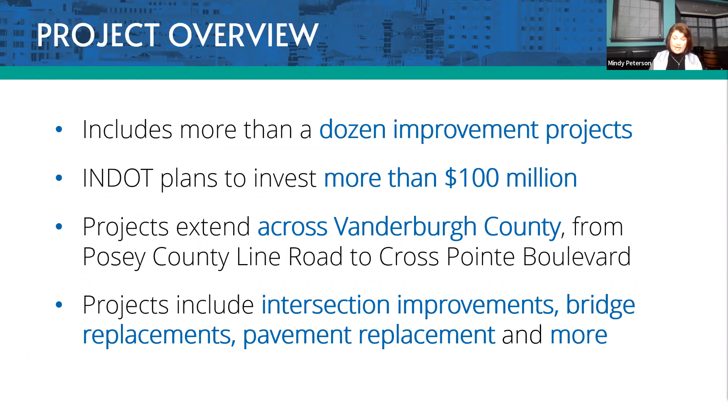So we're talking about improvements at several intersections, bridge replacements, and pavement replacement. That's a big improvement — anybody who drives the Lloyd knows that. Those are all the things you'll be hearing about tonight.

Let's start with a map here that we're going to bring up. There's a lot of information on this map. I'll tell you, it's also available on the project website — that's thelloydforyou.com. If you haven't been to the website yet, it's a great resource for information.

After we wrap up tonight, you'll find a recording of this meeting, the presentation itself, and maps like this one. All of the maps that Toby and Jeff will be referencing are also on the website, and you can zoom in for a better look at what you're seeing tonight.

Some of those major improvements are on the far west side of the project — those are part of phase 2. You'll be hearing more about phase 2 from Jeff; those plans are still in the works, as we're still getting to the point where we are today with phase 1. Stay tuned — you'll hear more about phase 2 this fall when we have another public meeting.

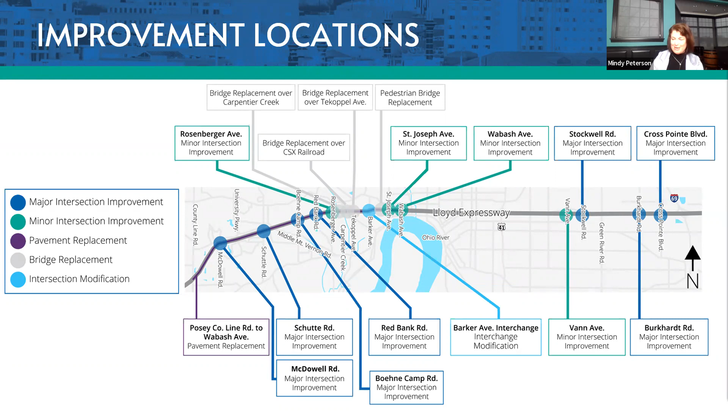Let's talk about the big picture. We're here to share preliminary designs, and more detailed maps are available now — a lot of good information we'll be able to share with you. We know the Lloyd is very important to Evansville, so we've been talking to a lot of people right along the Lloyd — business owners, stakeholders, folks with the city — to make sure we're keeping all of those considerations in mind as this project is developed.

We do anticipate touch points with the public later this year, so we'll be ready for a public hearing for phase 1. That's a little different than this meeting tonight — that's when we will kick off a public comment period.

We'll have comments at that hearing. You'll be able to sign up to speak. So that will be a big one. You'll have plenty of notice, and you'll know when we're getting ready for that phase 1 public hearing.

We also will have a phase 2 public meeting. Already touched on that, and that's when you'll get a little more detail for those phase 2 projects.

So what's been happening with the Lloyd? Well, the project team has been hard at work here. Preliminary maintenance of traffic plans are being developed. What that's really focusing in on is when we have construction underway on these improvements, and there are a lot of improvements, how do we keep that traffic moving? How do we try to take as much of the stress and hassle out of this construction period as possible? So how are we maintaining access and keeping traffic moving the best that we can during construction? All of that work is underway.

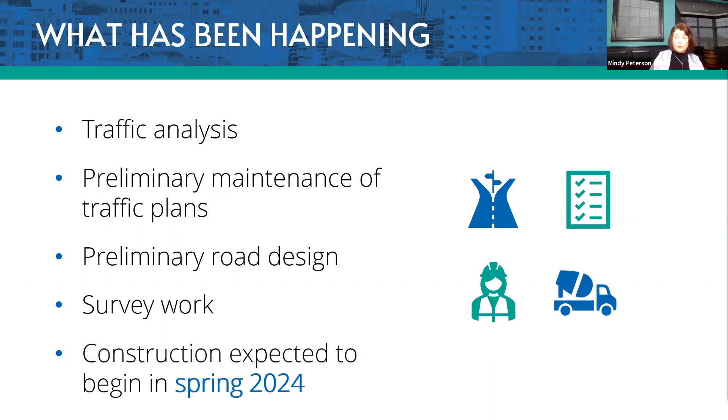We also want to hit on the purpose of the Lloyd4U. The easy way to say it here is we're making the Lloyd work for you. Traffic doesn't always flow, we know, as you want it to on the Lloyd Expressway. I know there's some frustration there as people sit at traffic lights and some starting and stopping. This project is all about improving safety and mobility while maintaining that accessibility. And Jeff and Toby will both be talking about how we plan to do that.

I'm going to be very frank and very honest with you. I said this the other night, and it's just the truth of where we are with this. It's called the Lloyd Expressway, and I know there's frustration because people want it to operate like a true expressway. That's not where we are here. We can't come in and start all over again, and there are a number of businesses that are right there along the Lloyd. So what we are doing is coming in, taking a really good look at the area. INDOT is making a major investment with $100 million.

So what's reasonable? What's feasible? Where can we get the most bang for our buck and make improvements all throughout the Lloyd that will really make a difference? But these are things that are workable and doable. So those are the solutions you'll be hearing about tonight.

A big part of that process in finding the solutions is getting innovative. So we're going to talk now about alternative intersections. You can see there, when we talk about alternative intersections, there are some real benefits. There are fewer conflict points. That means improved safety, fewer crashes, keeping that traffic flowing in a better way. You're increasing that efficiency, you're maintaining that access that we've talked about so much. The way you do that, alternative intersections really are helping you organize traffic in a different way. So you're still making turn movements that you are today, but we're doing that by organizing things a little bit differently to make those left turns. So we're going to talk a little bit more about that now.

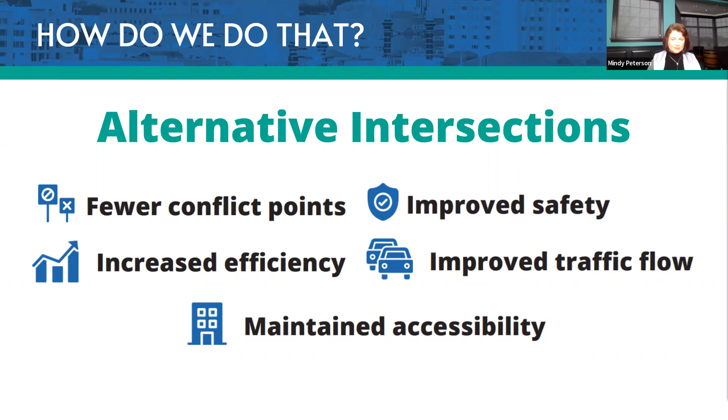Let's get into alternative intersections and what those really are. We'll start with some basics here. When we talk about alternative intersections, the terminology may be a little bit new to us, but alternative intersections have really been around for decades now. And the very important part of this is they have worked really, really well in many other areas across the nation.

Where these alternative intersections have been in place, you have seen improved efficiency, more vehicles getting through in the same amount of time. You have also seen dramatic improvements in safety with a lot fewer crashes. These are becoming much more common because they work, and when you have an improvement that works, that's when you're going to see it in place in many more places.

So they're doing exactly what they're supposed to do with improving traffic flow, efficiency, and safety. When we talk about organizing that traffic, it's really focusing on the left turns. When you think about making left turns at main intersections, that's where we can see a lot of problems, because if you're making that left against opposing traffic moving at a pretty good clip of speed, should there be a crash there, we know that can be a very serious crash.

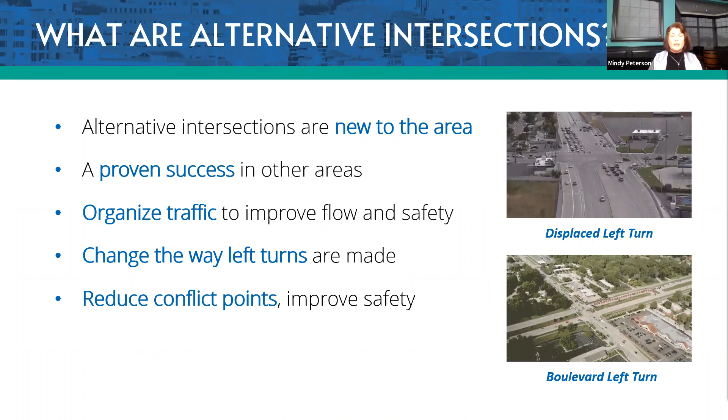So let's talk about displaced left turns. Let's start there and tell you what we mean when we say this. Left turns are still being made at the main intersection, but you're not doing it against that opposing traffic like before. Instead, we're pulling back and organizing traffic in advance before you ever get to the main intersection. So there's going to be a traffic signal and a dedicated lane.

If you want to go left, we're going to move you to the left before you ever get to that main intersection. What that means is when you do get to the main intersection with that traffic signal, it's green time for the traffic moving through on the road, and it's green time for you moving left, but your paths are never crossing. That's a much safer situation, and you're moving a lot of traffic.

That's also known as a continuous flow intersection. So that's a name that you may have heard and encountered before, and we'll be hearing more about those as we hear about some of the specific intersections here.

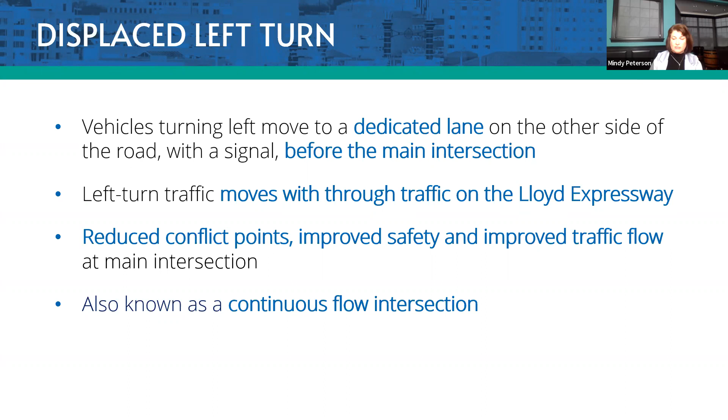Also want to talk about a hybrid solution very quickly. This includes elements of a displaced left turn that we just talked about, but also what's called a boulevard left turn. A boulevard left is when you actually go through the intersection, then make a U-turn if you want to make that movement, which happens at a traffic signal. So it's a median U-turn with a signal, and then you're making a right turn, a much safer right turn at the main intersection.

When we talk about a hybrid solution, it's taking from both of those ideas, taking some from displaced left and some from the boulevard left, putting those together for a hybrid solution. Quite honestly, it's done because it makes the most sense at that location—it could be because of proximity to ramps or other roadways, but it's the right solution for there. We'll be hearing a little bit about where that makes sense for the Lloyd as well.

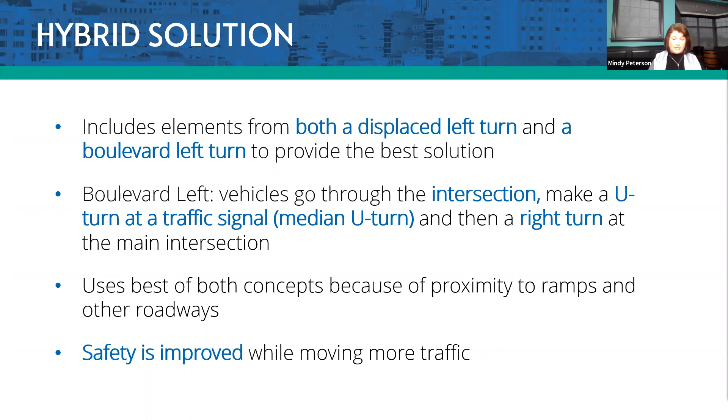We want to talk about videos a little bit tonight. This was something that folks who came to the public meeting in person were able to check out—the videos that we had and some really good simulations. You guys can as well. We just don't want to eat up the time of this presentation by running through the videos, but there are a couple of really good ones.

There's a new one that we have up on the website that is a simulation of these displaced left turns, going to show you exactly what to expect. I know it's hard when I'm using words to visualize exactly what I'm talking about when I'm talking about moving traffic over, so the video is going to help you get there and realize what we're talking about.

And then there's another video, a simulation video, that is a hybrid solution that is going to show you how those displaced left and boulevard left concepts can be working together at the intersection. So those are going to be really helpful—encourage you to check those out.

We have one more new video up on the website as well, and it's about 3 minutes, really worth listening to. We hear from Mayor Winnecke, who traveled to St. Louis a few years ago. He drove on some of these alternative intersections and saw them in action. He's a believer—he's excited about the difference they can make in Evansville and in the commute there on the Lloyd. So we hear from him, and we hear from Brent Schmidt, who is the city engineer.

We hear from lots of folks whose faces you are seeing. You're going to hear from them shortly. They also talk about these alternative intersections, but it does help to get an idea of the flavor of what we're talking about.

Brian, who welcomed you tonight, had a great example that made sense to me. We were talking about it and I asked him how he explains these alternative intersections to folks who don't understand them. He said it's a newer, better way of doing things. He used to have an old bag phone in the car, and that was the best he had. That's what we used, but that's not the case now. We all have these little computers we hold in our hands and use for everything. So the old way is not always the best way. There's a better way of moving traffic now, so why are we not doing it? I thought that was a great way to liken the situation, so I'm stealing your line on that, Brian.

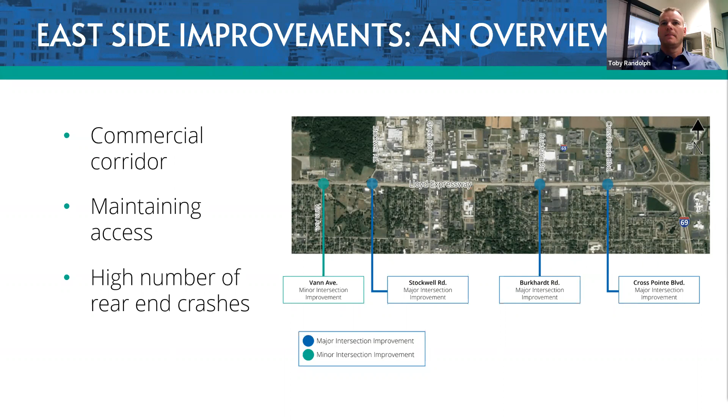So the first one I'll tackle is Vann Avenue. Vann is, as you know, kind of the low point as you come up over the hill of Boeke, and eastbound has a lot of the rear end crashes and even fatalities here. At this intersection, we are going to remove the signal. People say we're adding signals, but this one we're definitely taking out the signal and closing off the median with a barrier wall, so you can't do left turns or through movements across the Lloyd. This will basically make Vann right-in, right-out only at this intersection, giving eastbound traffic a free flowing movement coming up over the hill, which should eliminate most of the rear end crashes. The reason for those crashes is the sight distance is very short for this corridor coming over Boeke.

We will maintain pedestrian crossings, at least on Vann. The new pedestrian bridge over Vann will take you over the Lloyd, but we will not allow crossing of the Lloyd at grade any longer, which today the crosswalk has already been removed anyway. That will continue in the future, and that's how we'll get pedestrians through here.

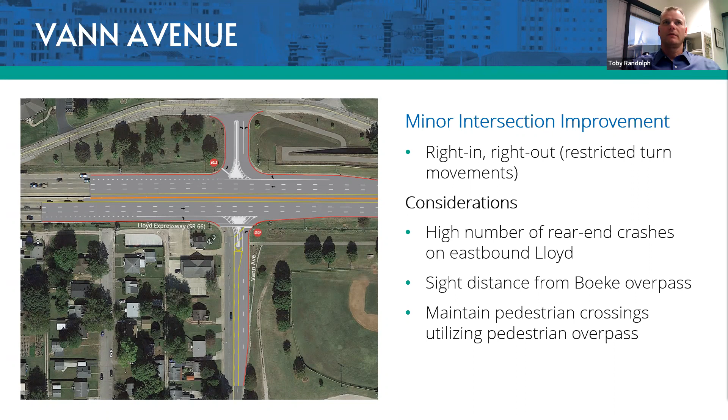That is Vann. Our first major intersection is Stockwell Road. Mindy described what a hybrid solution is, and Stockwell is our first intersection that has a hybrid solution, meaning we have a combination of a displaced left intersection and a boulevard left intersection.

The reason being, if we try to put in a full displaced left on the east side of the intersection, we have the Green River Road entrance and exit ramps. It's the entrance ramps that are the problem for westbound traffic, since we cannot get them over to do a left turn at Stockwell with a displaced left intersection. Also, doing a displaced left on the east side affects John Street, and we'd have to relocate it on the south side.

So to avoid that impact and get the proper spacing we need for the left turns, we've created westbound as a boulevard left. As Mindy described, with a boulevard left, if you're going to turn left on Stockwell, you go through the intersection to your own designated left turn lane with a signal that operates along with the other left turns.

And you do a U-turn, and then you come back and do a right. So that's how your left turn will go for your westbound.

Eastbound, as a displaced left, as Mindy described, you'll get over left before you get to the main intersection. You'll have your own signal. You will cross over, and then once you get to the main signal, you'll operate your lefts at the same time both the throughs go. So that's where we add green time and save more time on the phasing of an intersection, because the left turns and throughs go at the same time.

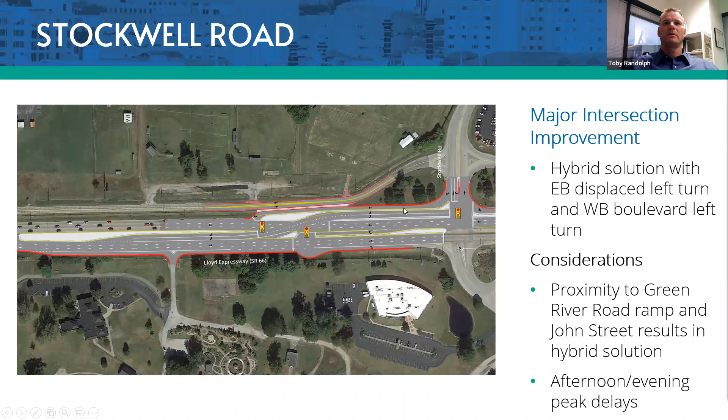The other aspect of this intersection is a right turn slip lane, is what we call it. So southbound Stockwell to westbound will have its own right turn lane. It takes it out of the main intersection and brings it down here to the left turn signal, and can also operate on a flashing arrow, or we haven't fully determined if it's a right turn on red or not, but they will have the option of moving on down from the intersection and saving time that way too. So that's our hybrid solution.

When we move to Burkhardt, we have more room. We have the room to put in the fully displaced left intersection. To describe this, you have a lot of peak hour delays. You have traffic backing up on Burkhardt. And obviously during the Christmas season and times like that, there's a lot of traffic going in and out, access points along this corridor. So the displaced left fits nicely.

The left turns, like I described, are both directions, westbound and eastbound, 2-lane left turns, so they hold a lot of capacity. Both northbound and southbound have the right turn bypass lanes as well, single lanes. So as I described earlier with Stockwell, this saves up to a minute of phasing, because these left turns get to go with the through movements.

So don't think of this as 3 separate signals. They are basically one combined signal working together. If you're stopped here at this left turn, then you should get the green to go here, and we're not trying to stop you twice. That's not the goal, to add a signal and make you stop twice. These will all work together and flow just like I described.

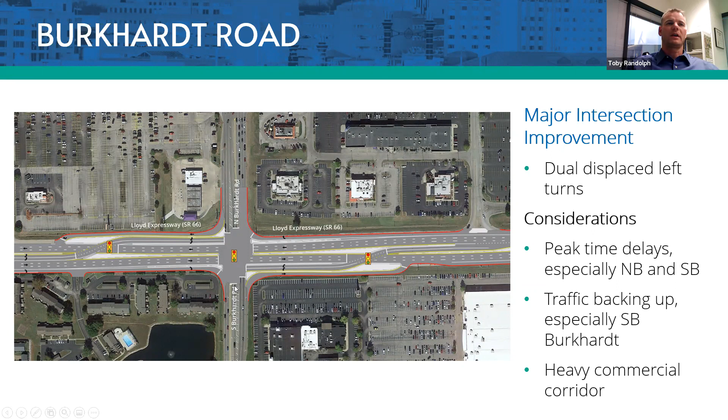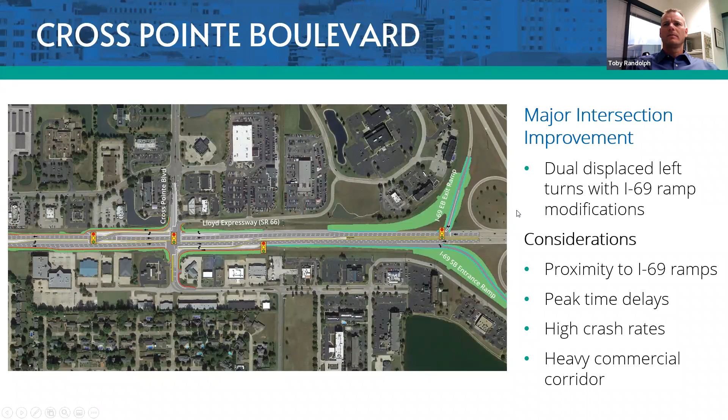So I believe that's it for my east side improvements, and I'll allow Jeff to describe the west side improvements to you.

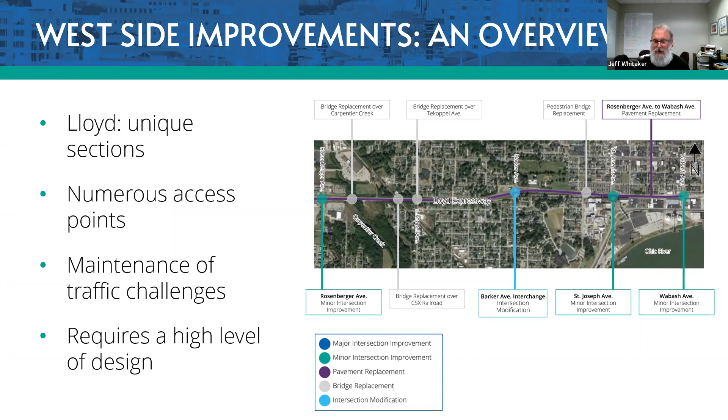So if we go to the next slide. There it is.

So here again, I talked about this a little bit. We're starting at Rosenberger and going all the way to the east side. We're reconstructing the whole pavement, removing the old pavement. This project was built back in the 1960s, so the pavement has kind of outlived its life and usefulness now, so we're going to rip that out and put in new pavement.

Currently there are 4 lanes of traffic out there, 2 in each direction from Rosenberger up to about Barker Avenue. Can you guys see my cursor running around here? And from Barker Avenue to Wabash Avenue is 6 lanes of traffic.

As part of this project, we're going to add 2 more lanes, one in each direction, all the way from Barker Avenue up to Rosenberger Avenue as part of this project and improvements.

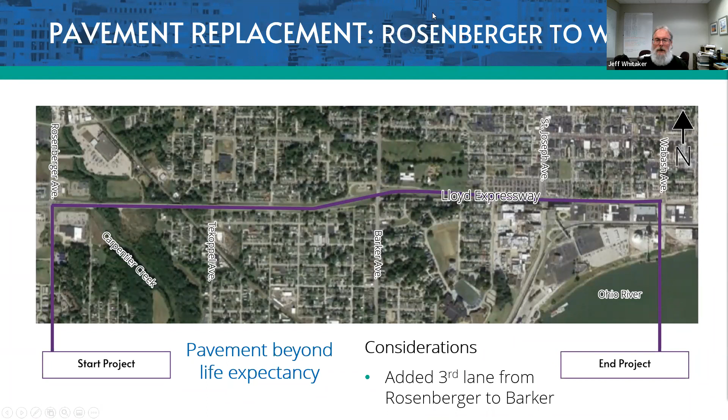The next slide shows us we're going to start with these intersection improvement projects, running from Rosenberger to the east all the way over to Wabash Avenue. Here on the side you can see some of the restrictions and minor improvements we're doing, some of the considerations we're looking at.

At the intersection of Rosenberger, we're going to extend the left turn lane right now and widen it out. Same thing on the other side. We're going to widen and lengthen that lane out on the east side of the project.

On the north side, we're going to tie back into Rosenberger at a certain distance to tie in the new pavement section, and on the south side we'll do the same thing. These typical sections are not going to change that much in this area. The one thing we are doing is lengthening the right turn lane.

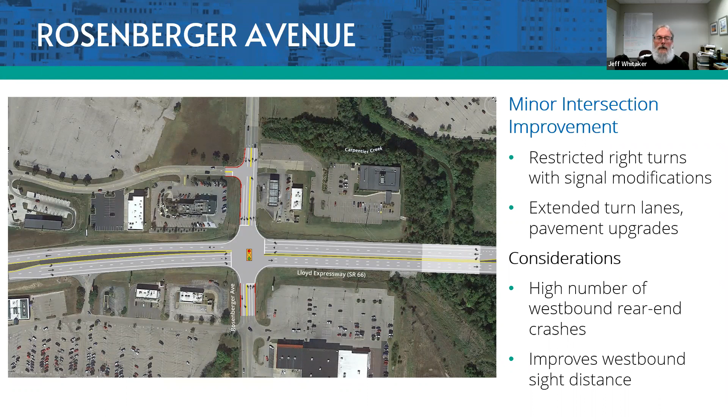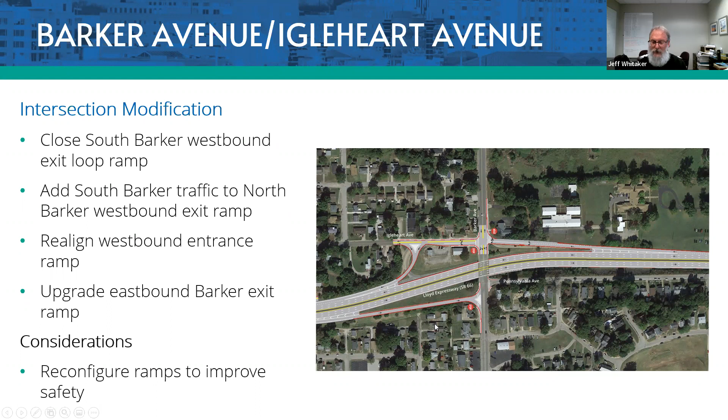On the south side, on the west-southwest corner of this interchange, we're basically just replacing that ramp as it is. If we go to the next slide, we're looking at that improvement. Again, we're on that southwest loop ramp here. We're improving this angle as you come off and exit the Lloyd onto that ramp, giving better drivability. Right now it's kind of a quick off-ramp exit.

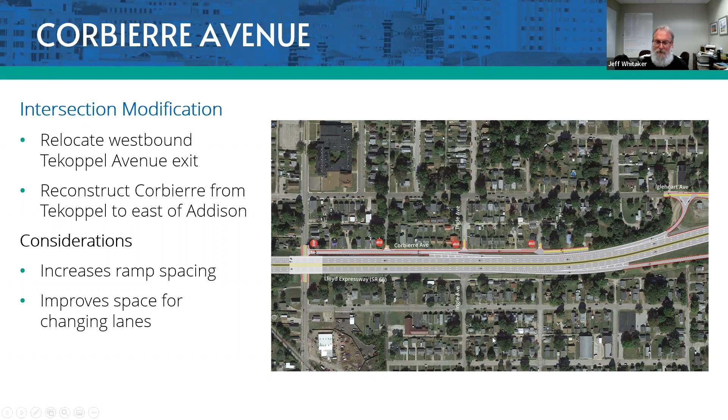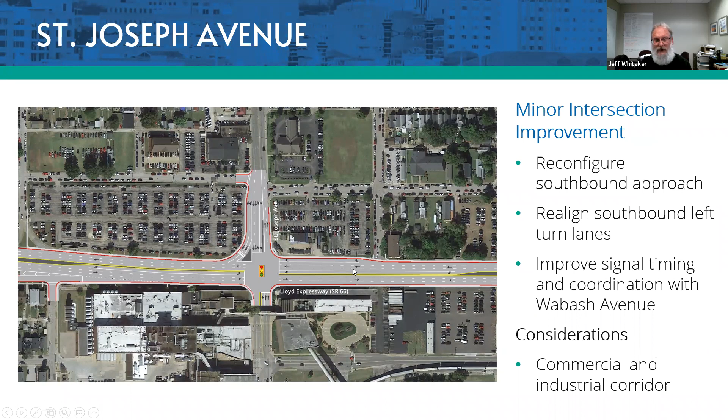At Wabash Avenue, we're looking at replacing the signal. On the west leg, we've got an extended left turn lane to keep the left and through movements from conflicting with each other. On the east leg, there's not too much we can do in this area because of the existing MSE wall that comes down both sides of the road here, and then there's the bridge over at 9th Street, not too far down the road.

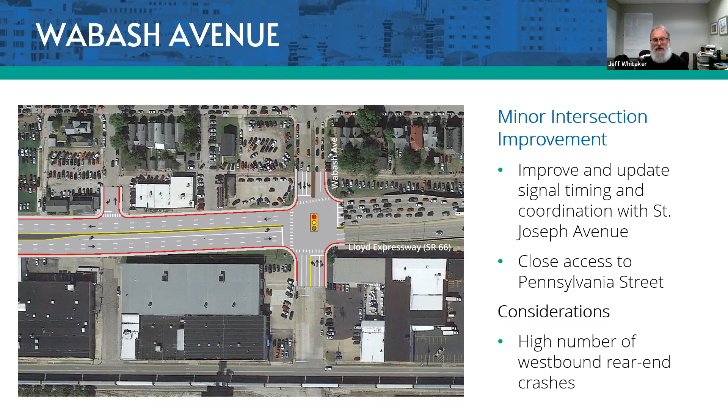We've been talking about replacing these signals here, at Wabash, at St. Joe Avenue, and at Rosenberger. As part of our traffic analysis, we looked at what happens not just at this intersection, but how that affects the whole corridor down through there. So we put our information into a traffic model, and that model runs through different cycles, and you can go in and adjust these traffic signals to work and talk to each other and function as one corridor project instead of just looking at each individual intersection. That should really help move traffic through the corridor.

We also talked about bridges being replaced. In this project, we've got 3 bridges over certain items, and then 1 pedestrian bridge. We've got 1 bridge over Carpentier Creek, the CSX Railroad, and Tekoppel Avenue. Those 3 bridges are right there in a row, and then the pedestrian bridge is down there towards St. Joe Avenue, which is going to be replaced as well.

Part of improving safety out there is at the CSX Railroad, we have to raise that bridge up to really get the clearance we need to meet new standards for the railroad track. As we do that, we're going to shave that hill off so you can get better sight distance as you come up and over that hill, going eastbound and westbound as well.

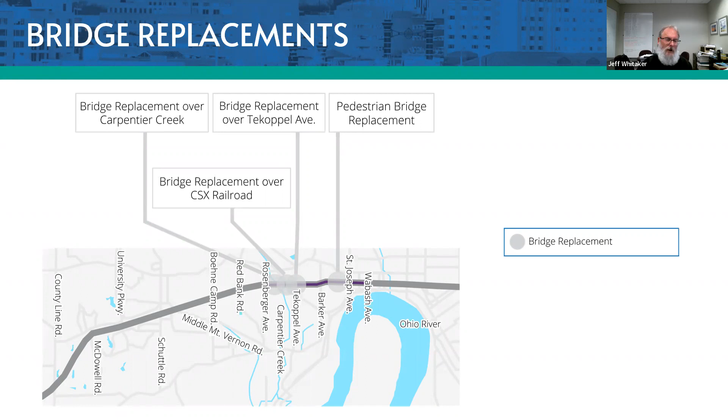I had mentioned something earlier about trying to look at some of these minor access points down through this corridor. We've looked at the major ones with St. Joe and Wabash and Rosenberger, so we've also looked at some of the other minor intersections. Of course, anytime you have an access point, there's always a chance for a collision, a rear end collision, or a side swipe. The fewer access points you have, the fewer accidents you should have along the corridor.

This is kind of a unique situation on this side of town where we have a lot of additional minor accesses. We actually did a survey through the website, and it came back very positive about trying to get rid of some of these. A lot of people understood the reasoning why; some didn't like it, but they understood that the fewer access points we have, the safer the corridor will be. So right now, what we're looking at, starting on the left side and moving to the right, we've got South Ingle Avenue on the south side over there.

Moving to the right, the next closure is Lemcke Avenue, just west of Ray Becker. Then North 12th Street, just east of Ray Becker and St. Joe Avenue on the north side. There's also a little section of Pennsylvania Street that runs parallel with the Lloyd Expressway right off Wabash. We're going to close that off as well. It's a small one-way street that most people don't even know is there, so it's a good point to close off without worry.

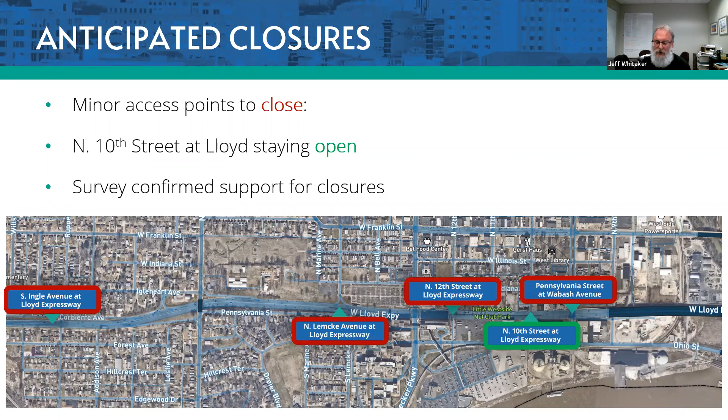The next thing I'd like to look at... there we go. That wraps up phase one. We talked about the west side projects and east side projects. Now I'll talk a little about phase two projects on the Lloyd Expressway.

Here again, we're starting at the county line and running to Rosenberger Avenue. This is total pavement replacement. This section was built back in the 1960s, so the pavement is getting worn and torn, and it's time to replace it. We'll also be looking at the different intersections coming up.

Barry, I can't move. There you go, thanks.

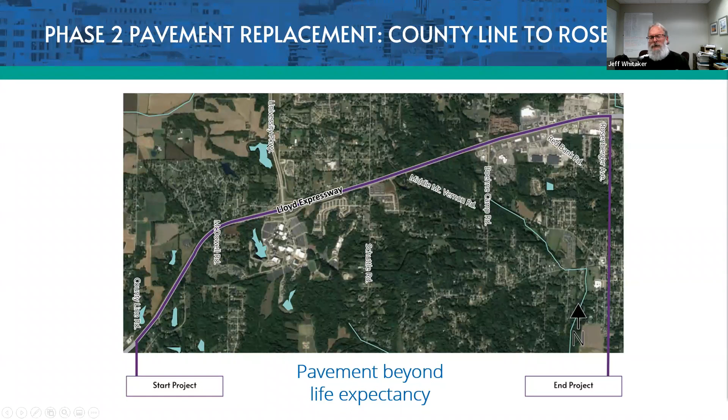We should finish up our traffic analysis here in the next month and really start our design work. As we get the traffic analysis and design work done, we'll be updating the website to let people know exactly what is coming your way. As Mindy said earlier, we should have another information meeting like this one, and the in-person one we had earlier this week, to talk more about the phase two section projects in the fall. And with that, I think Mindy's going to talk about the next steps.

Yeah, I'm going to wrap us up here with next steps. We gave you a lot of information. I do want to briefly talk about right-of-way, since that's a question people always have when we're talking about these major construction projects.

We want to let you know, while we only have preliminary designs at this point, there are no relocations, zero relocations, associated with the Lloyd4U improvements. There are only some strips of permanent right-of-way; most of the right-of-way needed for the project is only temporary. If you are close to some of these improvement areas and have specific questions, use the Q&A function to send those to us. We'll get you some answers and connect you with folks you're able to talk to.

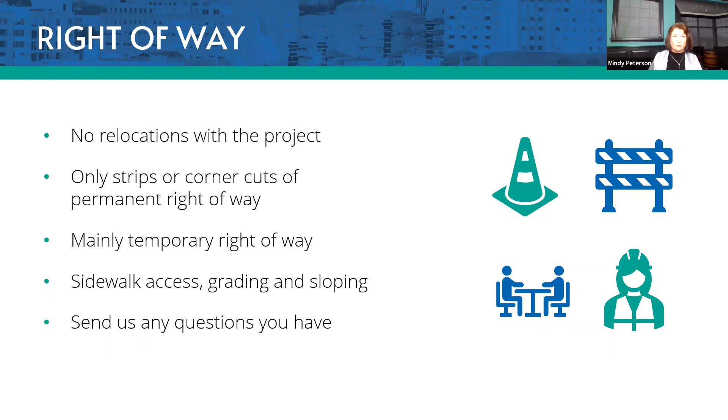When we had the in-person meeting this week, we were able to sit down with corridor plans, show people lines on maps, and answer questions that way. We're not afforded that luxury tonight, but do take advantage of the Q&A function to ask us any questions you have regarding right-of-way.

Next steps: in addition to tonight's meeting, we also had that in-person meeting we talked about, so we're asking for your comments and feedback. The project team takes a serious look at those. We want to know if there's something we haven't considered yet, something else that should be on the table. We'll take that information and react to it. The project team is also completing preliminary designs and the environmental assessment. We already mentioned those public touch points we'll have this fall.

We want to show you this phase one timeline. We have two phases here that you've heard about for the Lloyd. Phase one extends from Rosenberger to Cross Point. We will complete the preliminary design work and environmental assessment and advance to that public hearing.

We'll share that information this fall. Phase two then extends from Posey County Line Road to Rosenberger. When you see that next timeline, that's basically the far west side of the project. Everything is following just a little bit behind on that phase. The team is finalizing the preliminary designs. We'll present those this fall, and then you can expect a public hearing in the spring.

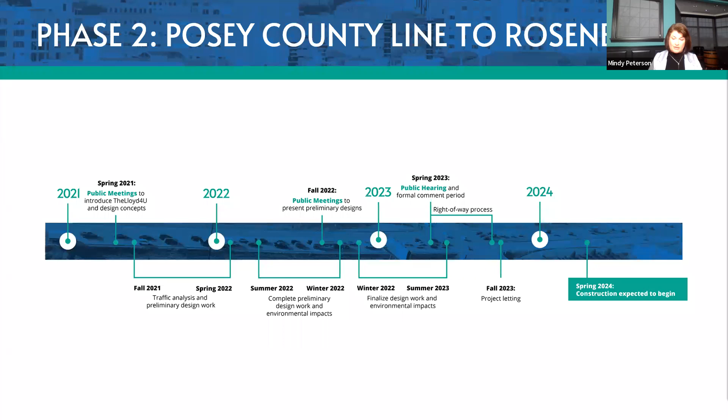So we've talked about two phases. This is being let as one project, and that's going to allow some improved coordination. We also anticipate some efficiencies during construction. So again, letting as one project in the fall of '23, construction expected to begin in spring of '24.

So we've shared a lot of information. There is still a lot to come. So how do you stay on top of what's happening?

It's pretty easy to follow our progress. There's some information up here as far as the website and social media. If you're a Facebook or Twitter user, follow us if you're not already. There's a lot of good information.

In addition to the videos I already talked about tonight, we have some very short ones, 60 seconds, 90 seconds, with some project team members. They're a great glimpse into what we're doing, giving you a better understanding of the projects. You'll see the maps, the timelines, all of that good information is available for you there.

If you do have questions or comments, I encourage you to use that question and answer function that's available in the chat. Anything that's not a real quick response, anything that's more detailed, we will use your email and get back in touch with you.

We're also going to keep that Q&A function up for about 5 minutes after the meeting wraps.

We're getting close to that wrapping point. We'll keep that open and live just for about 5 minutes because sometimes those questions come a little later.

And then we want to go one more slide forward, because I know not all questions may come to you tonight, so these are our contact channels. Those are also available on our website. INDOT for You is a great mechanism for those questions and inquiries that we might get.

Great tracking there, they're going to make sure you get a response. Those go to INDOT for You, come right to the project team so that we can get you the answers that you need. I know we said we're going to keep most of those questions for offline discussions on the specifics and send information.